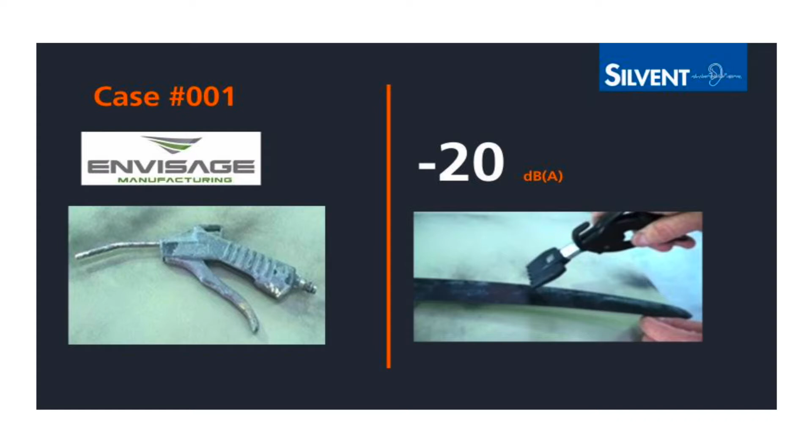And what we did was we looked at how and what they actually blow. We replaced it with a Silvent product and gave them a 20 dBA noise level reduction. By just changing the way you use your air to blow, it's not just fitting a nozzle and you get a 15% or 20% reduction. It's actually looking at how your air comes out and what you're hitting.

So in a lot of cases, it is very simple. With a big product, you use a flat wide nozzle. It reduces exposure time, it reduces your running costs. And in this case, there were 150 blowguns in the factory.

Massive noise level reduction for the whole factory, not just for the operators. But each one of those blowguns took less than one shift to pay back in terms of energy savings. Like Peter said, when you reduce noise, especially when it comes to blowing with compressed air, which is one of the biggest noise sources in a factory, it is massively economically viable for you to do it.

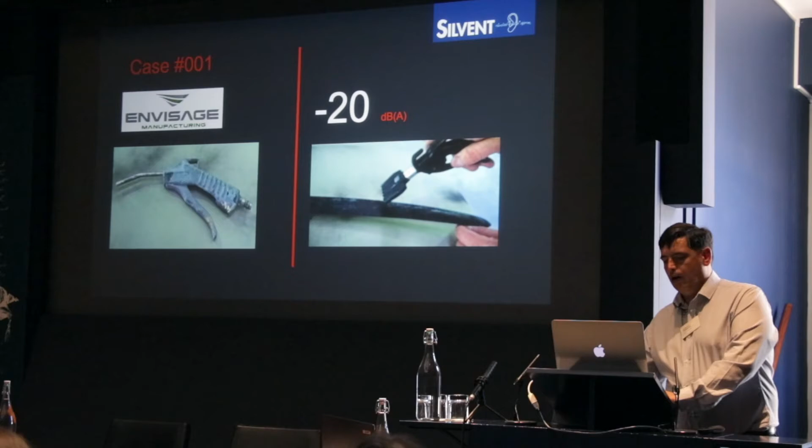The most common product is a compressed air blowgun, but there are other items that are used in terms of open-ended pipes, inside machines, inside enclosures. And the reason why we are this passionate is every minute of every day, that is the amount of people that are injured at work in the world.

Be it noise, be it trips, falls, etc. In the UK alone, the estimate is 15,000 people will suffer noise-induced hearing loss each year. And that is an estimate. Nobody knows the true figure, from the Health and Safety website.

And it's a legacy disease. It doesn't happen and doesn't hit you today. It hits you when you're older, it hits you when you're further on. Case in point, I was a young 17-year-old in the South African Defence Force. Bulletproof, nobody was going to get me, nothing would hurt me. We weren't supplied hearing defenders when we went to war, when we fought in Angola, and today I suffer from noise-induced hearing loss. I suffer with tinnitus.

It is my passion that everybody should at least know some basic facts. So when we present and we go around to companies, we speak to people purely on a noise factor. Because it is not nice to be sitting and not being able to hear your kids.

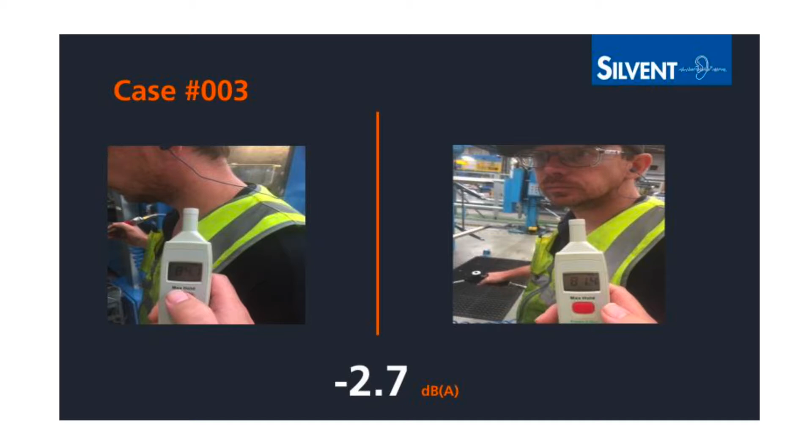With a range of products on the market, with just Silvent, you can reduce 2.7 dBA in this case, where they're blowing sharp edges, and there's nothing we can do when you blow at a blind hole. It is a sharp edge. Your best case for doing that is really changing the way people operate with the blowgun.

We have now started looking at what legislations are in Europe, what ISO standards, what is in the UK. And the reason why we do that is because a large market of ours is that, but it's also so we can help the rest of the world, which is developing at a rate of knots, so that they can learn from our mistakes, from the first world's mistakes.

Again, with the HSE, we have guidelines and controls in place. We have lots of acts, lots of regulations in place, but none of them are truly, really enforceable. That's why I love the American system, although I don't like the Americans.

In America, for instance, if this was in America, like my American colleague said to me, the noise control regulation - yes, it's very nice words, and we'd all like to do that, but people will not move unless they are forced to do it. Hence why in America they dropped their noise level from 95 to 85 dBA, because of the cost they started incurring. Everything in America is about cost through their healthcare, and the companies were losing money for their Medicaid. They now actually regulate that you have to be below 85 dBA.

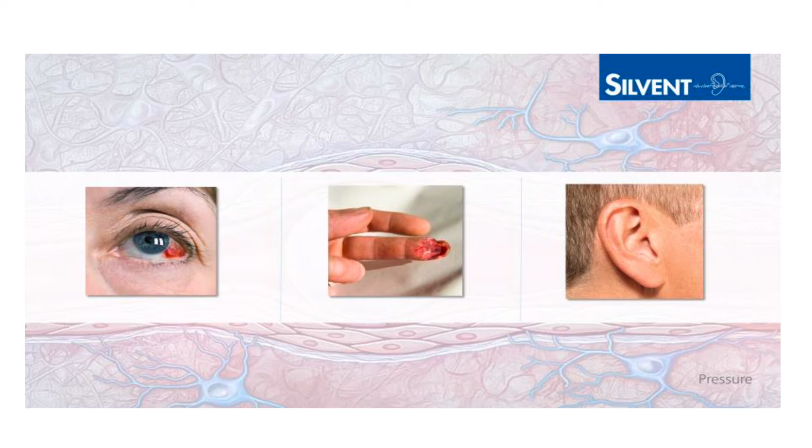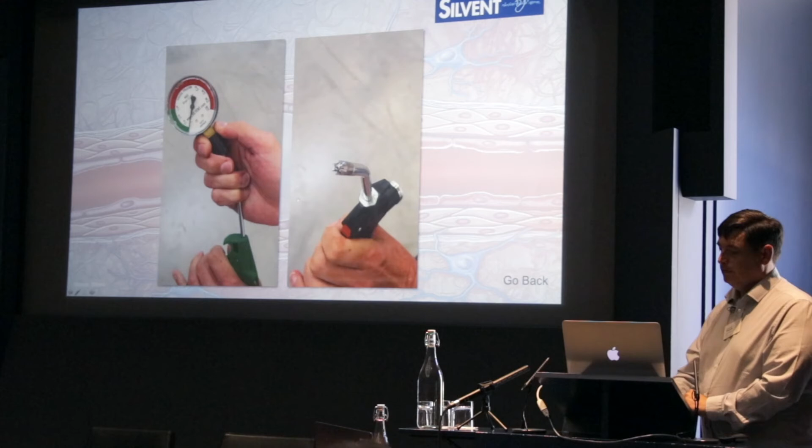To give you an idea of the difference between our product and what's on the market, we've done a pressure test, but you can also hear the difference in noise level. All we've done is fitted a compressed air nozzle on the end that we designed with multiple orifices, so that we can reduce the noise level by making lots of little holes, machining them really, really well, and also improving safety so people don't injure themselves.

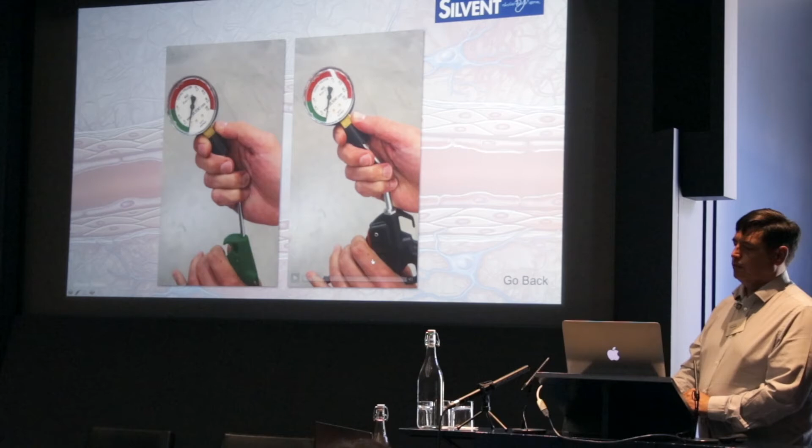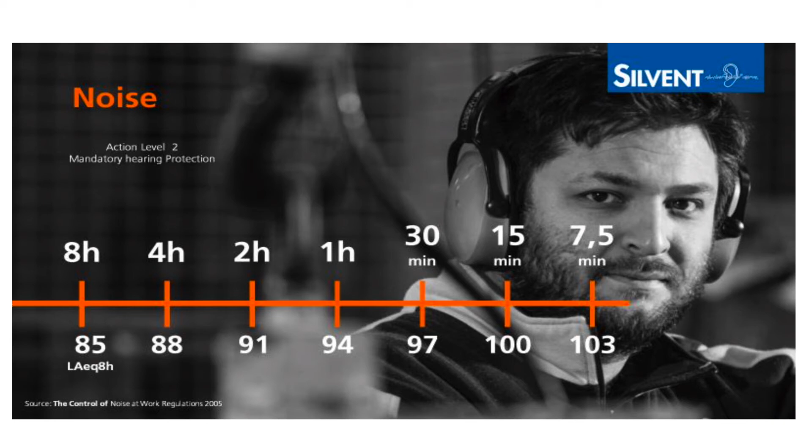Under action level 2, if you're not wearing hearing protection, these are the stats that show you will actually damage your hearing for life, with no recourse to repair in any way. In many cases we go to a factory, and most noise levels, for instance a compressed air blowgun at 5 bar, is 95 dBA measured from the human ear. That means most people who work in that industry for 1 hour will have damaged their hearing and never get that back.

And it is common because people don't wear hearing protection either. In many cases nobody actually teaches them how to use it, hence why we always recommend you do a train the trainer course and teach people how to use their equipment correctly. We do that whenever we sell a compressed air blowgun, we teach people about the full dangers of blowing with compressed air. We don't just say you need to replace it with a Silvent nozzle or blowgun, we also look at whether you really need it, because if you can get rid of it, that's 100% saving on noise, and it will make a massive difference to the factory.

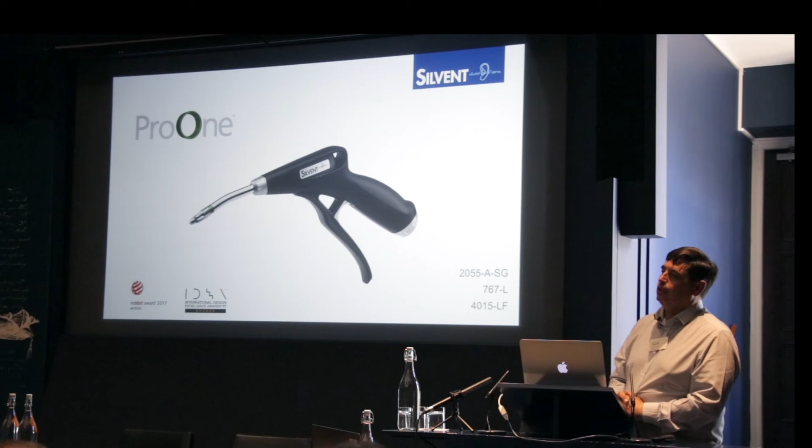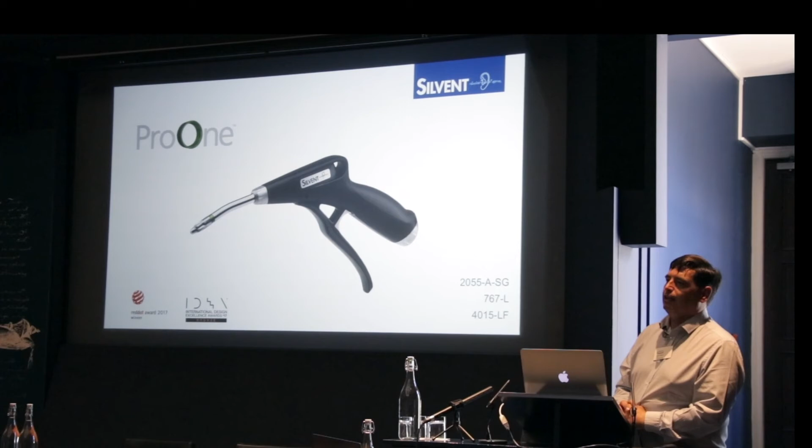Right to the point where our pride and possession in our range is our safety compressed air blowgun. It's won design awards for ergonomics. It is very low in noise and vibration for handheld use. It's been tested, taken 5.5 years to develop. The nozzle on the end is the quietest in the marketplace. It blows at below 80 dBA at 5 bar. It generates the same blowing force as a standard regular everyday air gun. It's also made out of a very nice plastic that is virtually indestructible. We've driven a forklift truck over this and it doesn't break.

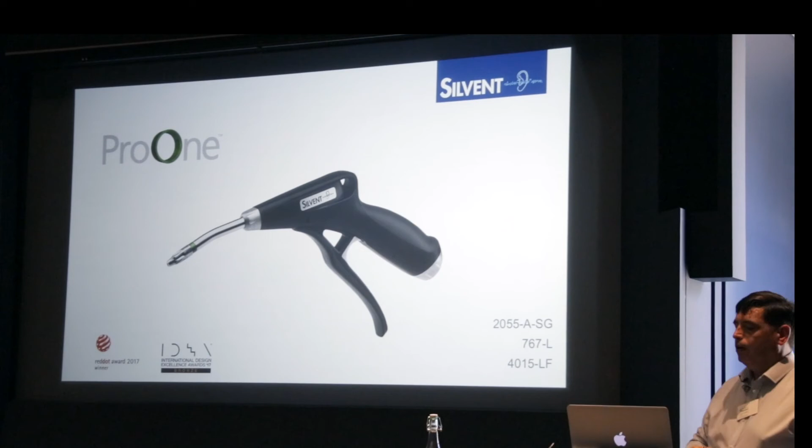And it is all stainless steel construction, right down to the bottom of the blowgun, the aluminium bit, where we've actually put in a device that will stop it when you disconnect it so it doesn't go... it will go. Why? Because our passion is reducing noise.

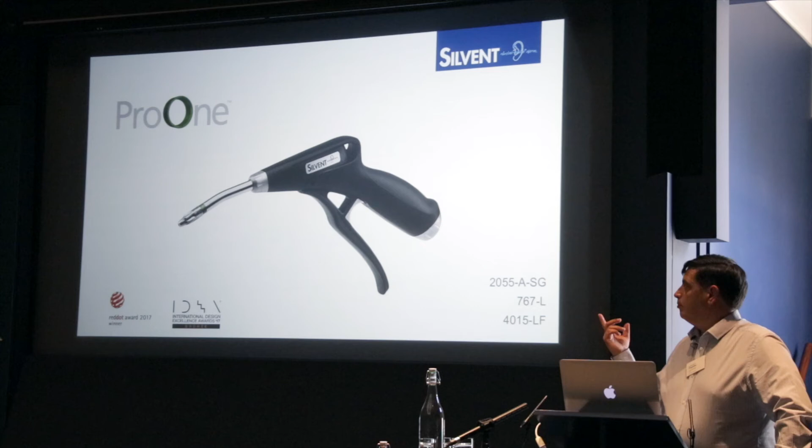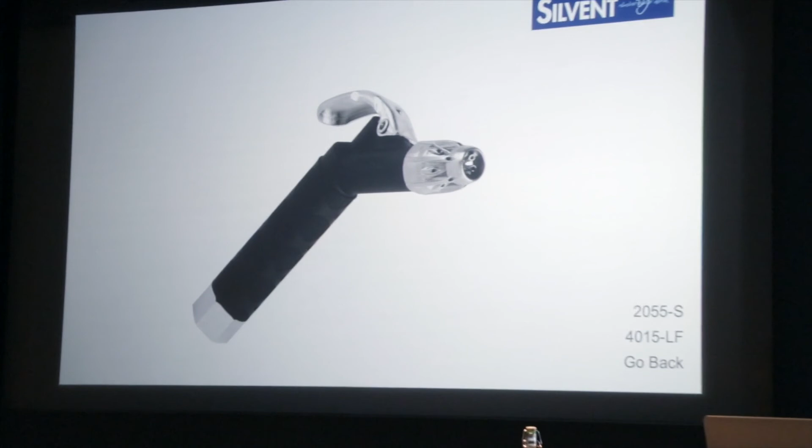All our products are now moving to the new nozzle type because of the lower noise level reduction. So we've brought out, again, more ergonomically designed, high-powered blowguns. This is for industries such as tissue papers and steel industries, where they generally use an open-ended pipe with a ball joint at 125 dBA. You fit something like that and you're down to 90 dBA. Unfortunately, when it comes to very high forces of air, it's very difficult to get the noise levels below 85 dBA. But in most cases, your compressed air is not the issue, it's the machinery or the steel running down tracks.

And why is a good working environment important? We all work in offices and we all enjoy our offices because we have our creature comforts, we have our coffee, but in the factories they don't.

And why is it important? Because it improves your productivity, it improves the welfare of your staff, but most importantly, it makes you feel a lot better when you look after somebody's health. I know it certainly does for me. That's why I go to work every single day. It's because I know slowly but surely we make a difference to people losing their ears.

And a nozzle, in worst case scenario, will drop the noise level by 17%. And it's a quick and easy thing to fit on.

In most cases, when we go to a factory, we ask, why is that there? Most of it is a legacy, because that's how we've always done it. Or B, I can buy a piece of copper tubing for 25p. But it generates a noise. We don't think of the noise level.

Like Peter, we go around factories for free. We do noise tests, we do spot checks on noise, and we write them a nice report. And we say, you can buy this product, it costs £100, it gets paid back within 8 hours.

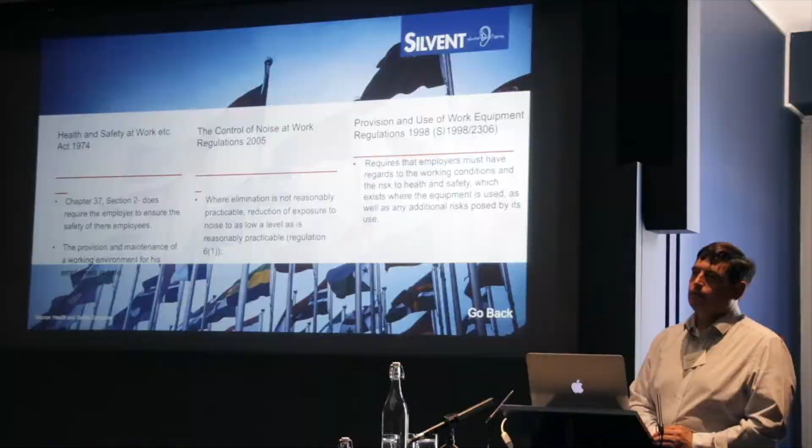I was shocked when I went to China and I did my first factory tour. And I said, oh, that's noisy. And they said, what can we do to make it quieter? This is what you need. There was no ifs, buts, or maybes. We walked out that day with our order.

There wasn't a fight for who does what, where, and how, because in Europe, that's the standard. We want to be better than Europe. And we can lead the way in England by having people actually taking belief in this document in terms of the control of noise at work.

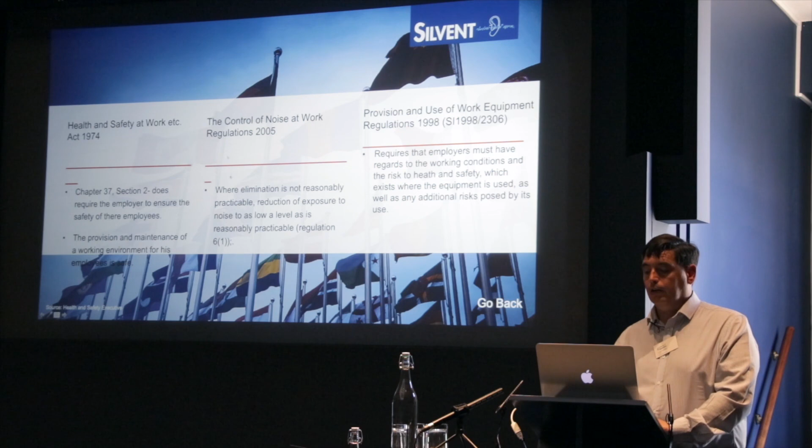Like I said, we have our design engineer. He would have been here and wanted to be here, but he's unfortunately just come off that 5.5-year project where he hasn't stopped working, so we have to give him a break. By law, we have to. Being African, I don't like that bit of the law, but the rest of it I enjoy.

He's currently now going to be, when he comes back, working on our next project, which is basically how do we make air even quieter at higher forces. He's done it for the standard products, and now he's looking at the higher force because that's where the biggest noise problems are, where the high peak noises are.

Using technology that was invented in 1950 or just after the Second World War, which they used to make jet planes go a little bit quicker. It's just called Laval technology. And it's so simple that anybody could actually really do it. But with our newer nozzles, we've just perfected it.

So again, why is a good working environment important?